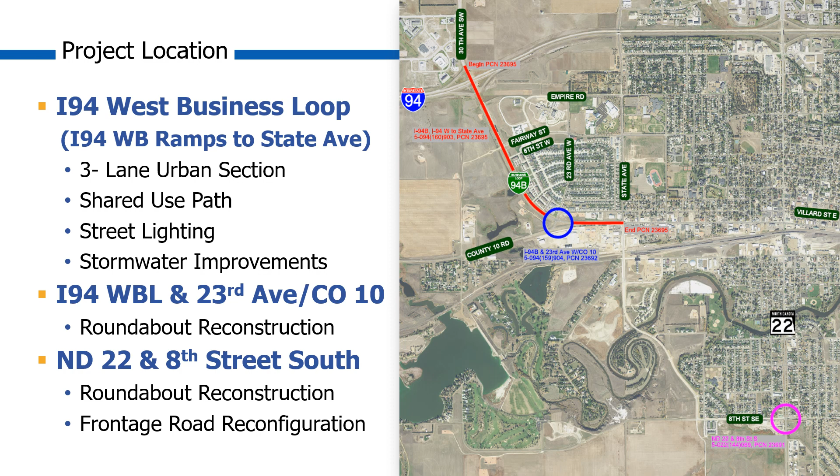These projects are needed to improve the safety, roadway deficiencies, pedestrian facilities, and long-term reliability of the roadway network in these areas of Dickinson. Step for a successful project is obtaining environmental clearance as required by the National Environmental Policy Act, or NEPA. This is the stage the project is in.

Many categories are reviewed in the evaluation of project alternatives to meet NEPA requirements. The most typical categories include wetlands, cultural resources, endangered species, environmental justice or social impacts, right-of-way, and private utility impacts. At this time, impact to these items is minimal or non-existent, so the project should obtain environmental clearance.

We will now begin to discuss details of the I-94 West Business Loop project from the westbound I-94 ramps to State Avenue.

The existing 2-lane rural ditch section on the West Business Loop will be converted to an urbanized 3-lane section similar to that on the East Business Loop in Dickinson. The roadway will consist of 12-foot driving lanes, a 14-foot two-way left turn lane, and 8-foot shoulders with curb and gutter.

A shared use path is proposed on the east and north side along with street lighting for the entire corridor. A ditch will remain on the west and south side. The existing ditch on the east and north side will be filled in. However, a shallow swale may be needed in some areas to accommodate the drainage design.

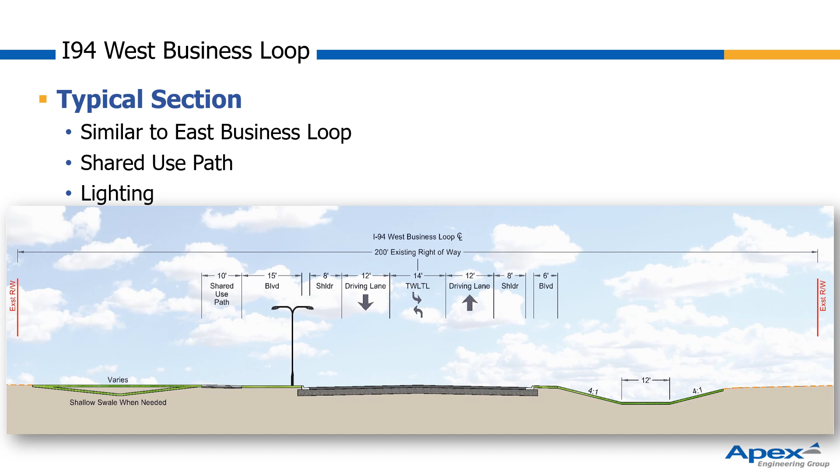As the West Business Loop 3-lane section approaches the State Avenue intersection, various improvements will be needed to match the 3-lane section on Villard Street that starts 1 block east of State Avenue at Hollywood Boulevard. The existing eastbound to southbound right turn lane will be removed and turned into green space.

The median in the southwest corner will be revised along with the traffic signals at the intersection. Villard Street will be restriped into a 3-lane section between State Avenue and Hollywood Boulevard to have a consistent 3-lane roadway all through Dickinson.

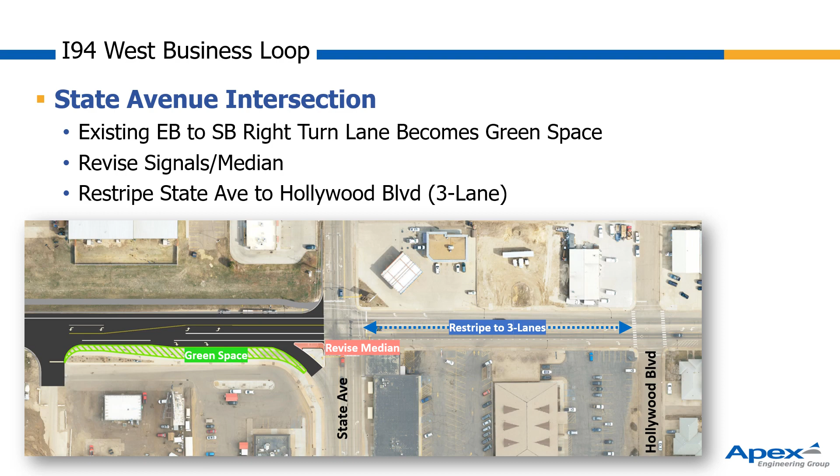The area of the West Business Loop across the I-94 interchange will receive a mill and overlay as the existing bridge is not wide enough for the proposed 3-lane section. The mill and overlay will start at the concrete just north of the I-94 westbound ramps and will stop just south of the I-94 eastbound ramps, at which point the reconstruction of the West Business Loop will begin.

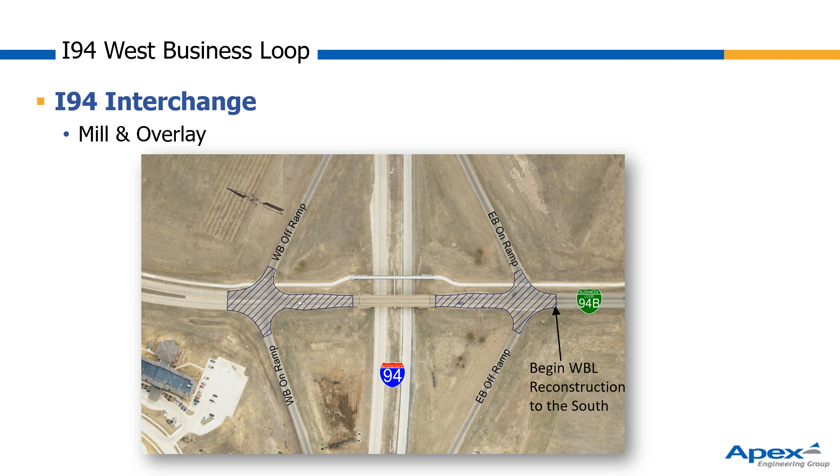Since the West Business Loop will be under construction, the City of Dickinson plans to extend water main across the West Business Loop at 3 locations shown by the red arrows. This will be to facilitate future development on the west side and avoid disturbing the new roadway in the future. This water main work will be 100% city funds.

This urban project is also eligible for enhancement funding, which will be capped at $450,000. These funds have the same cost share as the main roadway project. These funds cannot be used on the roundabout projects as those are safety projects.

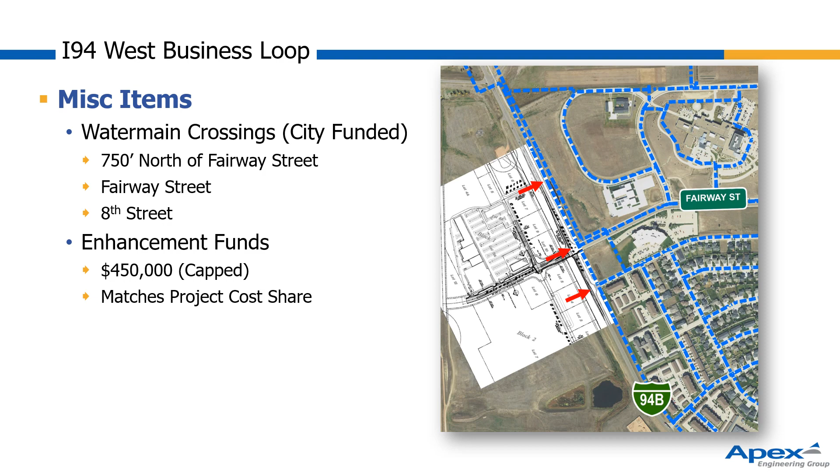Various landscaping improvements will be developed with these funds and implemented along the corridor. With the conversion of the West Business Loop to an urbanized roadway, a storm sewer system will be installed to convey the drainage. This system will include inlets along the curb to catch the roadway drainage and will also connect to 5 existing private stormwater ponds and outlet piping, as shown by the yellow circles. The storm sewer will collect all this drainage and discharge it at a single outfall location, as depicted by the star. This outfall location does not change the existing drainage pattern.

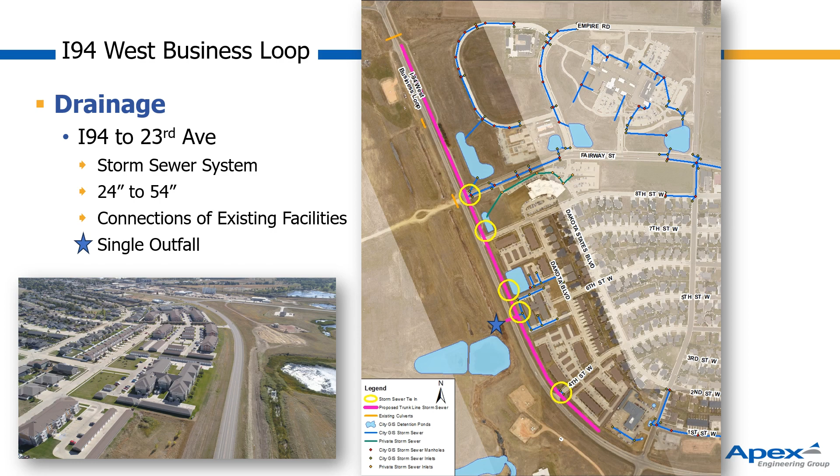Existing storm sewer facilities will be used to convey drainage between 23rd Avenue and State Avenue. The existing facilities are at or near capacity in this area, so the design will be developed to maintain the current flow rates into the existing storm sewer systems. One way to achieve this is by creating shallow swales to temporarily store runoff.

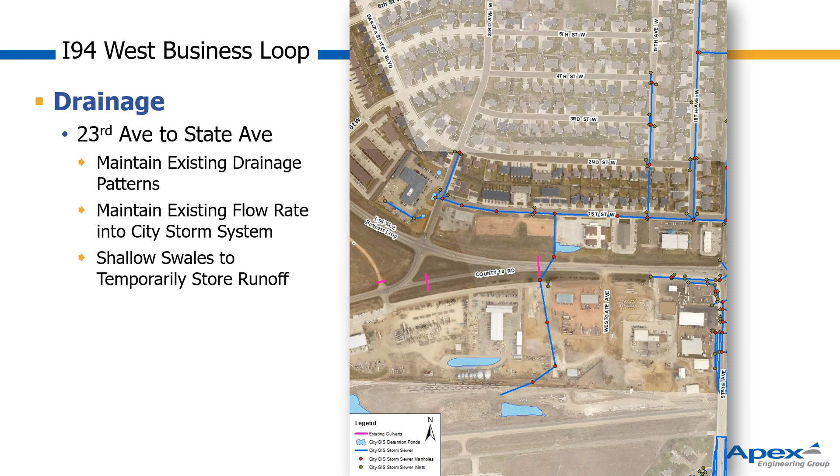To construct the West Business Loop, a 3-phase work zone plan will be used. In Phase 1, the existing roadway will be widened. Once widened, Phase 2 will start with traffic shifted onto the Phase 1 widening. This will allow for construction of at least half of the new roadway. Once this half is completed, the traffic will be shifted onto this portion of the new roadway, and Phase 3 will begin, which will construct the remaining portion of the roadway.

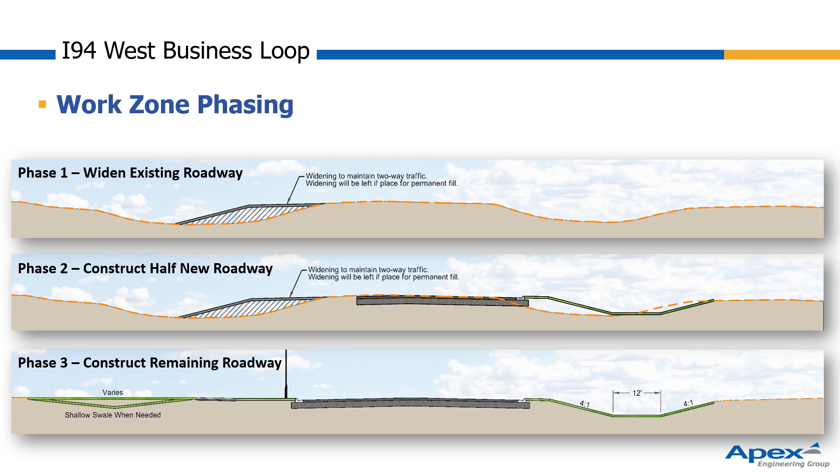Before discussing details on the 2 roundabout projects, some general roundabout topics will be covered.

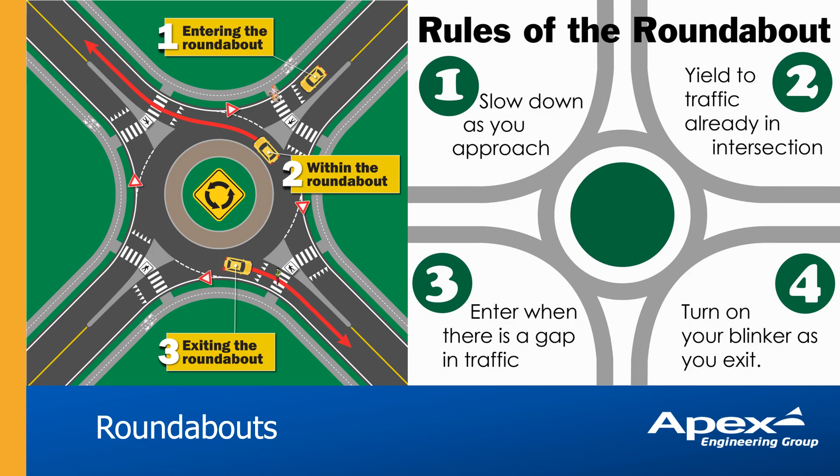Roundabouts have become more accepted by the public and are being used at more and more locations around the state. For those not familiar with roundabouts, here's a brief summary. A roundabout is a circular intersection where the user travels counterclockwise around a center island. There is no signal or stop sign to enter the circular roadway, only a yield sign, as the user must yield to the traffic already circulating the roundabout. To exit, a right-hand turn is performed onto the desired roadway.

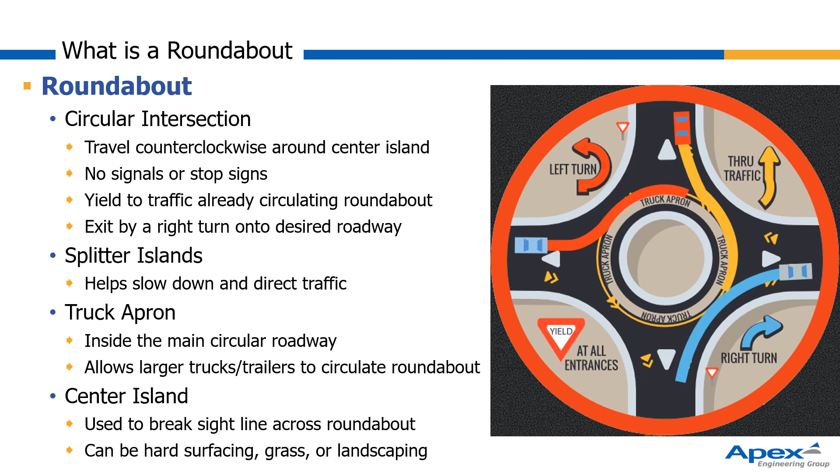The splitter islands on the approaches help slow down and direct traffic entering the roundabout. The truck apron is located between the main circular roadway and the center island, and allows larger trucks and trailers to circulate the roundabout. The center island is used to break the sight line across the roundabout and to bring awareness to users that a roundabout is present. The center island can consist of various materials, but in urban areas they usually have a landscaping element.

There are many benefits to roundabouts. One of the main benefits is increased safety for both vehicles and pedestrians. Roundabouts eliminate high-speed crashes and reduce the number and severity of crashes. A reduction in the conflict points, as shown on the right, is a key factor in the reduction in crashes and severity of crashes. Other benefits of roundabouts include the improvement of traffic flow as vehicles continue to move, increase in traffic capacity, accommodation of many vehicle types, and the aesthetics it can provide.

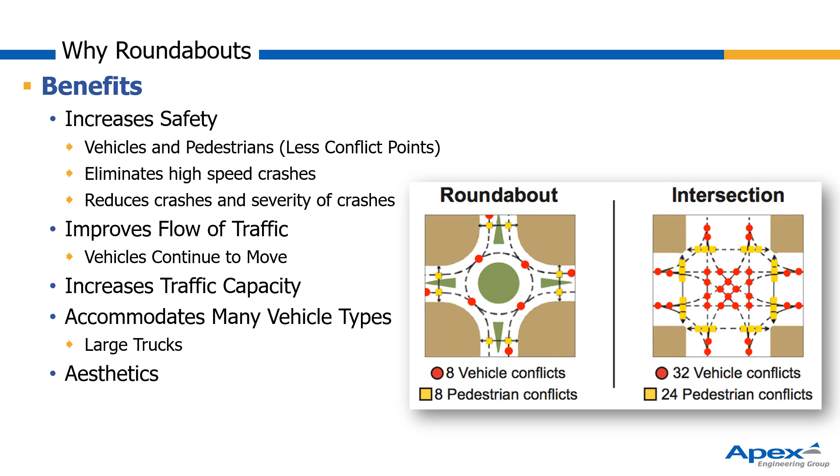Criteria for the roundabouts has been developed through many discussions with the North Dakota Department of Transportation and City of Dickinson. After reviewing many options, the roundabout size was set at a 140-foot inscribed circle diameter. As both roundabouts are on a truck route, the truck turning movement was set for a WB67, or a large semi. The design was completed so only the rear trailer tires use the truck apron. Oversized permits are being reviewed to determine if any additional adjustments are needed to the truck apron.

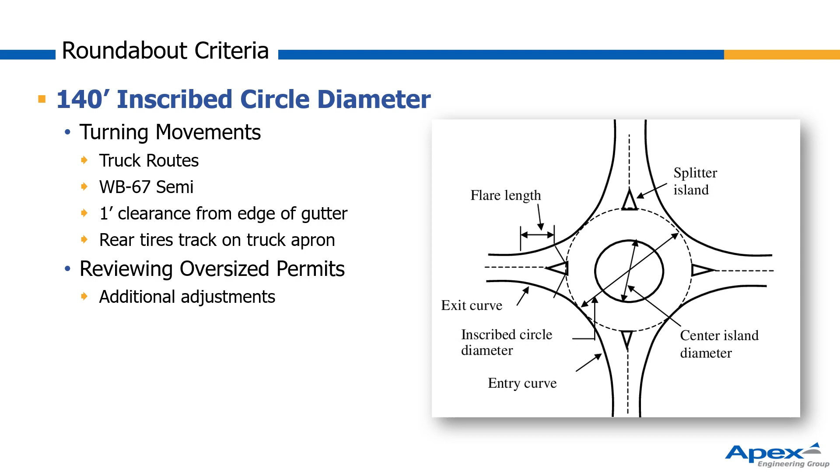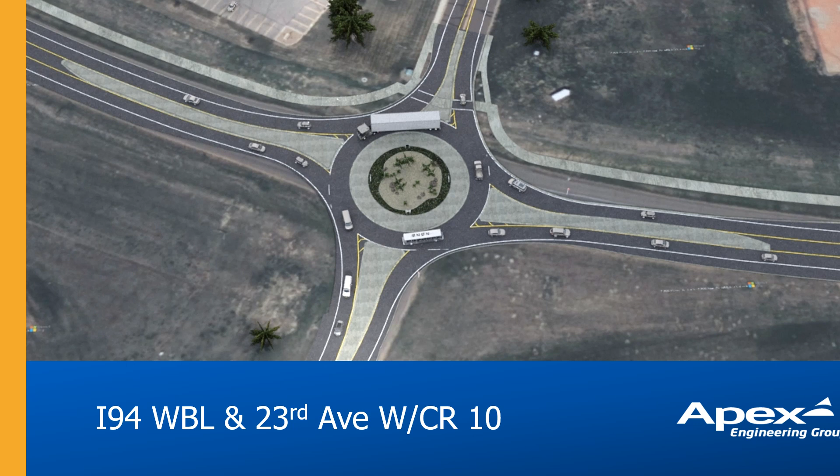Now that we have discussed some general roundabout items, we'll discuss the roundabout project at the I-94 West Business Loop and 23rd Avenue County Road 10 intersection. A visualization of this roundabout is shown here.

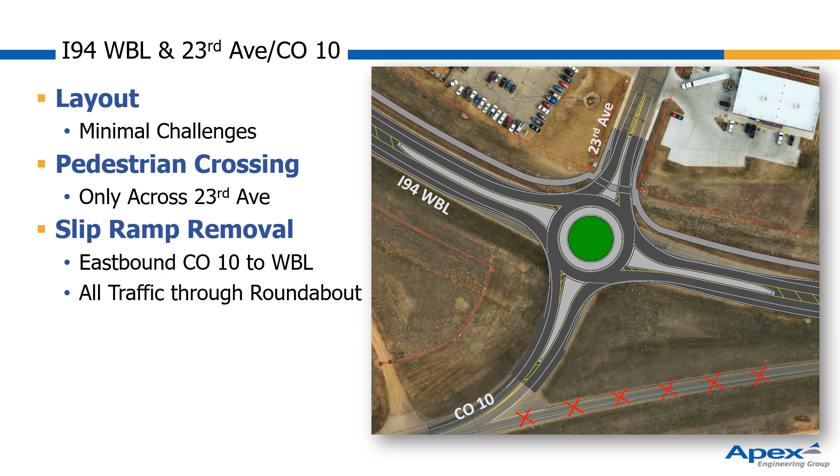Layout of the I-94 West Business Loop and 23rd Avenue County Road 10 intersection has minimal challenges due to the sufficient right-of-way and lack of access points near the intersection. This roundabout will only provide a pedestrian crossing at 23rd Avenue for the shared use path along the West Business Loop. The slip ramp for eastbound County Road 10 to the West Business Loop movement will be removed, as shown with the red crosses on the image. All traffic will be taken through the roundabout to facilitate a continuous 3-lane roadway without a merge that would be needed if the slip ramp was left in place. Drainage of this intersection is included in the main West Business Loop project drainage plan.

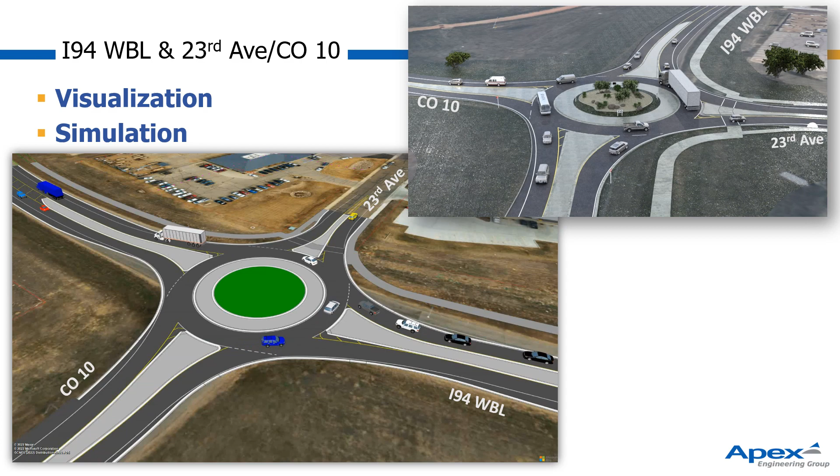To construct the I-94 West Business Loop and 23rd Avenue, County Road 10 roundabout, a temporary roadway bypass will be constructed so 3 legs of the roundabout can be built at one time. While traffic is on the temporary bypass, 23rd Avenue will be closed and access to local businesses will be maintained from the east. Once the first 3 legs are constructed, traffic will shift to these legs, and the 4th leg connecting to County Road 10 will be built. While this connection is being constructed, the slip ramp will be widened to carry 2 lanes of traffic, making a temporary connection for County Road 10. Once the slip ramp connection is no longer needed, it will be fully removed.

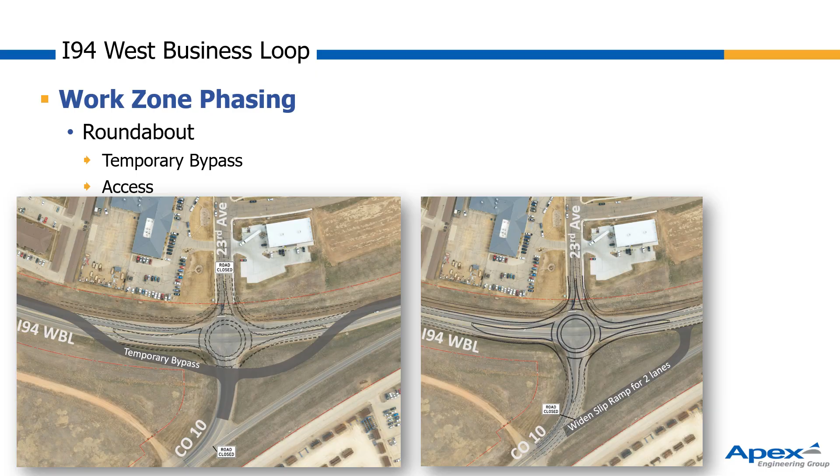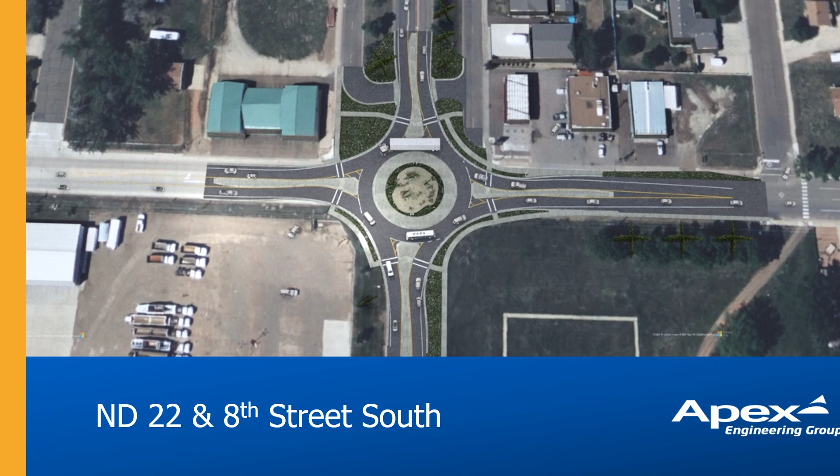The North Dakota 22 and 8th Street roundabout layout has challenges to address as part of the project development. Close access points, including both driveways and frontage roads, to the intersection have been a key topic of the project team during the roundabout development. The frontage roads need to be reconfigured as they cannot enter onto 8th Street as they do today. Cul-de-sacs were considered to terminate the frontage roads just north of 8th Street, but the cul-de-sacs would not be able to meet city standards nor the requirements for emergency vehicles.

The best solution is to curve the frontage roads into North Dakota 22 just north of 8th Street with right-in, right-out access due to the splitter islands. The splitter islands on all 4 intersection quadrants span across numerous access points: the Loaf 'N Jug driveway to the east, frontage roads to the north, the storage unit driveway to the west, and the Winn Construction driveway to the south. These driveways will have right-in, right-out access only.

Other options are available for left turn movements, such as other driveways or circulating the roundabout. As users begin to use the roundabout, new patterns will be developed to access the local area, as is typical with any change in roadway geometry.

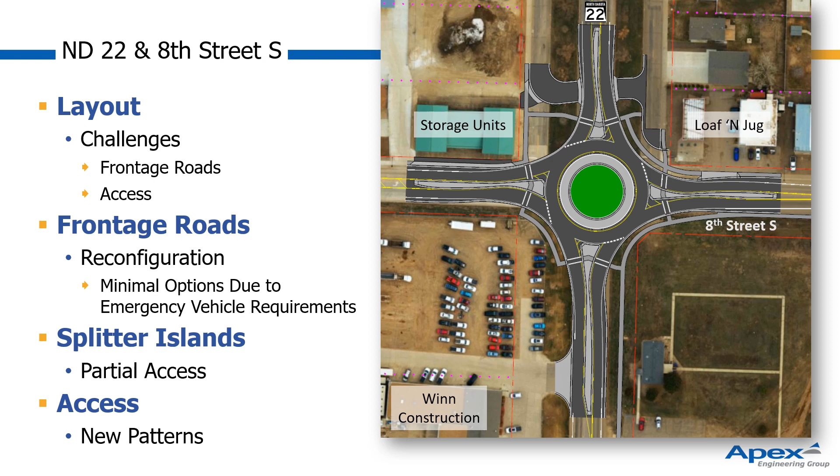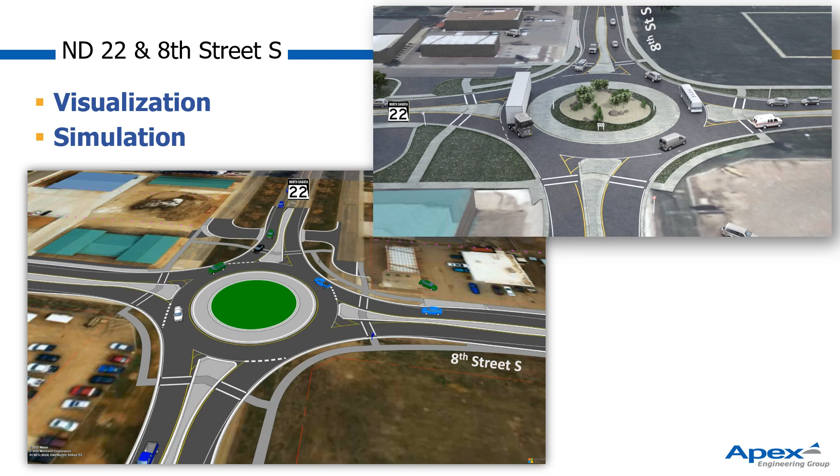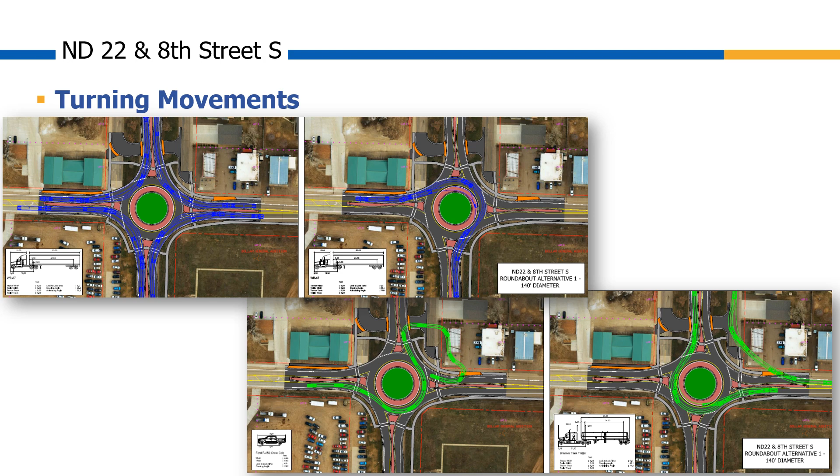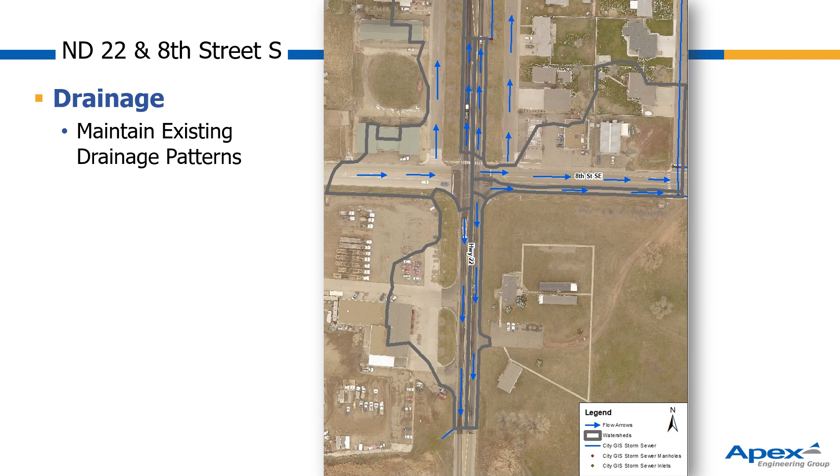Constructing roundabouts is easiest and provides the best final product when one leg of the intersection can be closed, as will be done on the West Business Loop. The North Dakota 22 and 8th Street intersection probably doesn't lend itself to closing one leg, so construction may be in many phases.

Constructing roundabouts in multiple phases can be like putting a puzzle together. Portions of the splitter islands and other curbs will not be installed in some phases so traffic can be maintained. When the roundabout is nearing completion, the portions of splitter islands and curbs left out to maintain traffic will be installed to finish the roundabout.

To help facilitate construction, the frontage roads will be used to bypass traffic, along with additional easements on the south side of the intersection to allow for the shifting of 8th Street traffic.

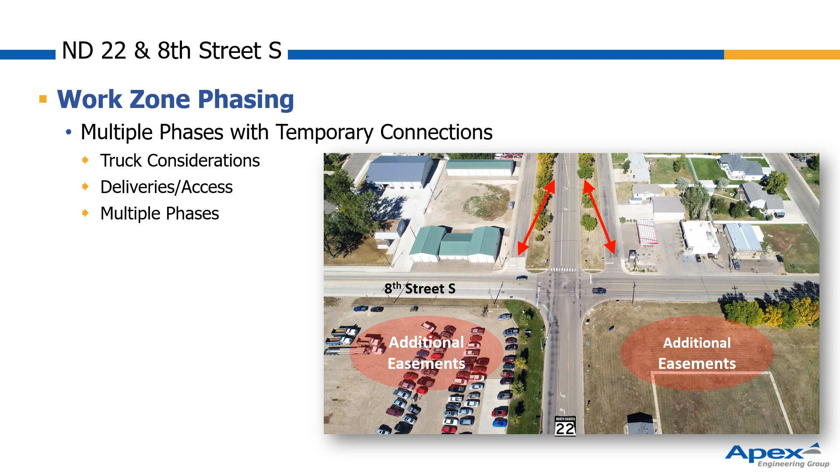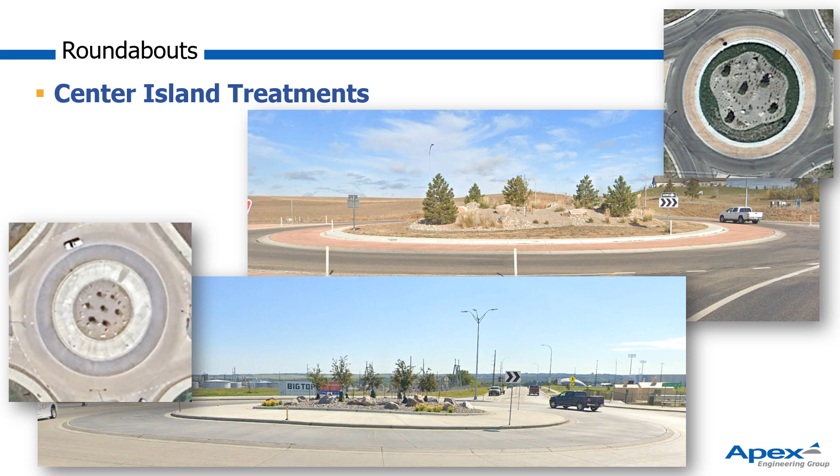A few project items remaining to be discussed include right-of-way, estimated cost, funding, and project schedule.

Currently, additional permanent right-of-way is not anticipated for any of the projects. However, temporary construction easements will be needed for grading of the project and blending of adjacent properties to match the new roadway. This blending will also ensure proper drainage. Temporary construction easements will also be needed along the West Business Loop, where the new storm sewer system is making connections to the existing private stormwater ponds and the outlet piping.

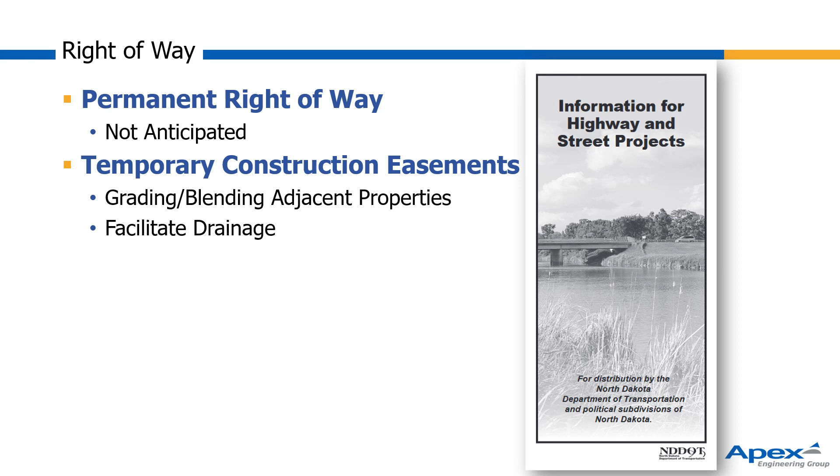Anticipated project costs and funding sources for the projects are as follows. The I-94 West Business Loop is funded at 80% federal, 10% state, and 10% local, with a total estimated cost ranging from $11 million to $13.5 million.

The I-94 West Business Loop mill and overlay of the I-94 interchange area is estimated to cost just over $100,000, with a funding split of 90% federal and 10% state.

The two roundabout intersection projects are funded with Highway Safety Improvement Program, or HSIP funding. The I-94 West Business Loop and 23rd Avenue County 10 intersection has an estimated cost of $3 million to $3.5 million, with a 90% federal, 5% state, 5% local funding split for the area within the I-94 West Business Loop right-of-way, and a 90% federal, 10% local split for portions of 23rd Avenue and County 10 beyond the I-94 West Business Loop right-of-way.

The North Dakota 22 and 8th Street intersection has a 90% federal and 10% state funding split within the North Dakota 22 right-of-way, and 90% federal, 10% local for the portions of 8th Street beyond the North Dakota 22 right-of-way. The estimated cost for the North Dakota 22 and 8th Street project is $2.2 to $2.5 million.